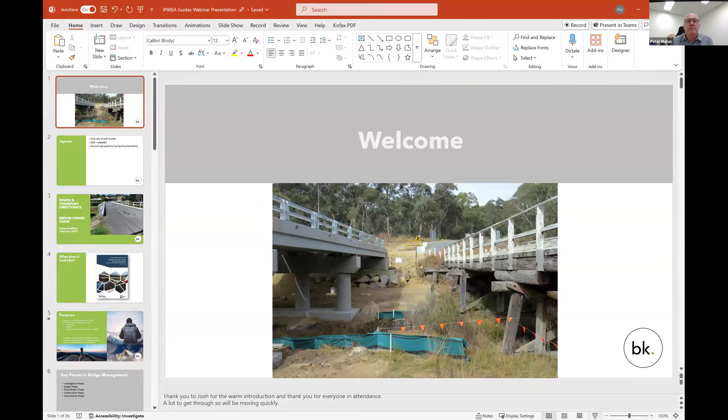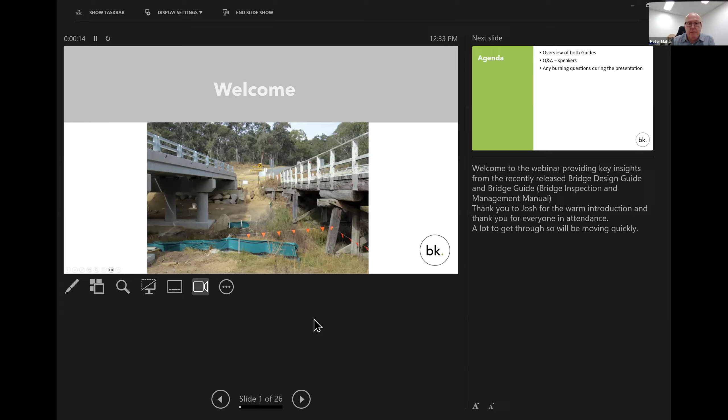I'll just share my screen and we'll get into the presentation. All right, I assume everyone can see that. Yeah, it's just on the presenter view, Pete. Oh, okay. We'll just stop sharing and swap things around a bit. Apologies for that. What about now? Yeah, all good. All right. Apologies for that.

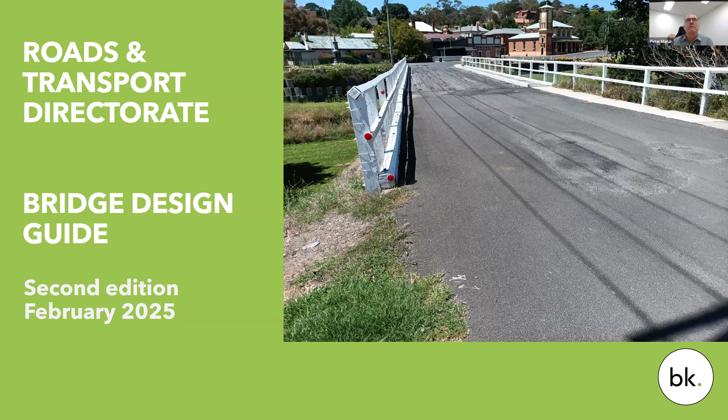So in terms of the guides, firstly, I'll look at the Bridge Design Guide. It's the second edition, so thank you for those that have been involved in the first edition. What's it look like? For those that haven't seen it, this is the front cover. I think Josh will talk about it towards the end, but it's available free for those members of the RTD. So just to give you an idea, that's what it looks like.

The purpose of the Bridge Design Guide was to look at investigation, design, construction and maintenance, primarily to assist local government team members involved in the management of bridge renewal projects in New South Wales. So it's really a heavy focus to assist local government, and particularly looks at guidance around what we call smaller bridge projects rather than the big Transport for New South Wales projects.

It's important to note that the guide is not intended to replace the wealth of existing information and publications available in this day and age. There's a lot of Austroads publications and other publications that are available, and it doesn't aim to comprehensively cover all the information necessary for bridge management. It's really a guide to point you in the right direction. So also, there's some really good Austroads presentations and documents, publications around. They're free.

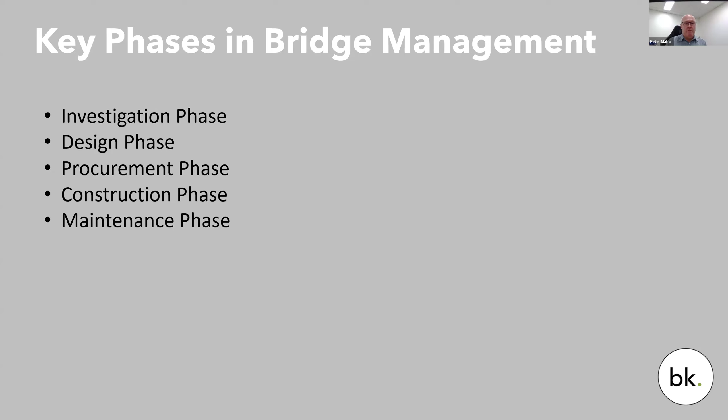So in terms of investigating a bridge when working out you're going to replace it, we've divided the guide into three critical areas. Prelim investigations are things you can usually do yourself, and are well worth doing before you get into detailed design required investigations. The detailed design required investigations are investigations you really should do prior to the bridge design. You can package them up to a consultant to do both, but generally a hydrology and hydraulics investigation and a geotechnical investigation should be done before the formal part of the design commences.

In terms of initial prelim investigations, have a look at council's records, and if you're lucky enough to have a bridge supervisor or a bridge team, get out and talk to them about what they know about the bridge. Even locals may know a little bit about flood levels, those sort of things. Do a site visit. We encourage everyone to get out and have a site visit, view the bridge, do your dial before you dig. I think it's called BYDA now. I don't know what that stands for, but it's the old dial before you dig.

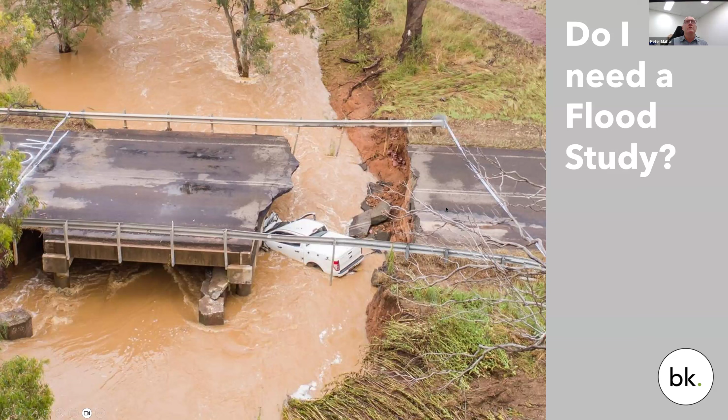One of them is that a bridge under AS 5100 should withstand the ultimate limit state load, which means structurally it should still be standing. It doesn't mean there won't be any damage, but structurally the bridge should still be available for use for a 1 in 2,000 year flood. That includes the effects of debris and scour. Debris loads can be quite large in a flood, particularly as the debris builds up against the bridge just before it overtops. That 1 in 2,000 year is usually extrapolated from the 1 in 100 year information, and that's allowable under the code. It looks at velocity of the water and the height that is going to be overtopped.

And then scour protection is also looked at to be 1 in 20 in AS 5100, so it survives a 1 in 20 year flood. In this case, although it's an older bridge, probably designed quite a while ago, it hasn't had the capacity to take the volume of the water during a flood event, and that would either be scour protection or the actual size of the bridge and its capacity to take a flow. So quite important. I just wanted to make that point around hydrology studies.

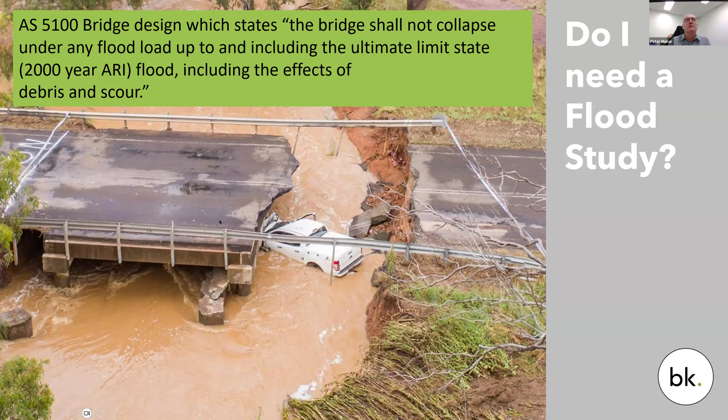A simple 1D HEC-RAS study to get velocities and heights shouldn't cost you a lot of money. Really should only cost $2,000 or $3,000. So people think flood studies cost hundreds of thousands of dollars. A simple catchment study for a bridge or a culvert shouldn't cost you a lot of money.

And then, yeah, I just wanted to labour on the hydrology and hydraulics. A lot of people get a little bit confused around that. Geotechnical investigation: at the end of the guide, we've actually got a sample document that you can use to go out and get your geotechnical investigations for bridge design. Key point there is you need to drill down to good strata. So you need at least 3 meters into a founding material, and that's usually intermediate to high strength rock.

So no point going out and dropping a drill rig down to 10 meters, not finding any rock, pulling up stumps and then giving that to a designer. The designer is going to tell you, I can't design the bridge foundation based on that information. So at the end of the document, we have got a standard brief there that you can use with some ideas around how you handle additional drilling depths and varying those in a brief that doesn't cost you a fortune when the driller's out there.

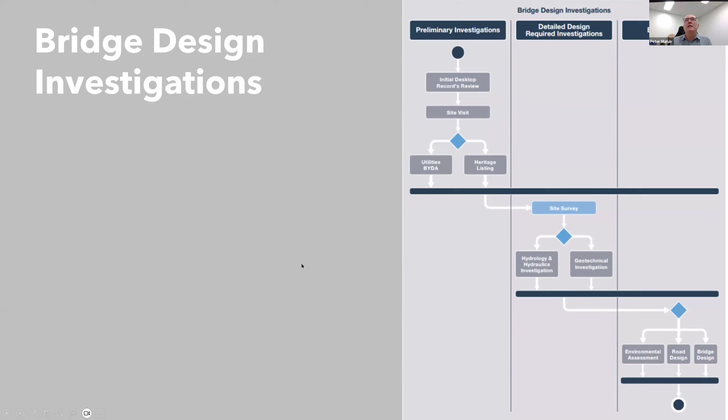And then in terms of during the bridge design, you'll have a road design component and you'll have environmental assessment. Some environmental assessment consultants or internal, you might be able to do that back in the phase before the design. Some require some prelim design information to go back into the environmental assessment. So just be aware that all those things can relate to each other. The road design and bridge design can impact on each other. So you need to be aware of all those things during a bridge design and manage them accordingly.

Again, just reiterating that the Australian Standard for Bridge Design, AS 5100 from 2017, is the required document. And then you've got the design phases. So typically, you can vary these. You do a 20% concept, which would only be a couple of pages, a plan view and a side view, but it just locks in the position of your bridge and gets everyone on the same page. You can jump straight to 50% design. There wouldn't be a lot of detail, but it allows you to lock down the key details before you move too far ahead. You don't want to be moving the location of the bridge at 80 or 100% design.

80% design is typical. We generally recommend 50, 80, 100, IFC. At 80 typically you've got quite a bit of detail, but there might be a few sections and some minor detail missing. Gives everyone an opportunity to review things like bearings and traffic barriers, and the design alignment for the road in a bit more detail. Then you'd move to 100%, which would be providing more detail and taking action on the 80% comments, and then really 100% to IFC should be just picking up any minor errors before you issue the IFC, issued for construction, documents.

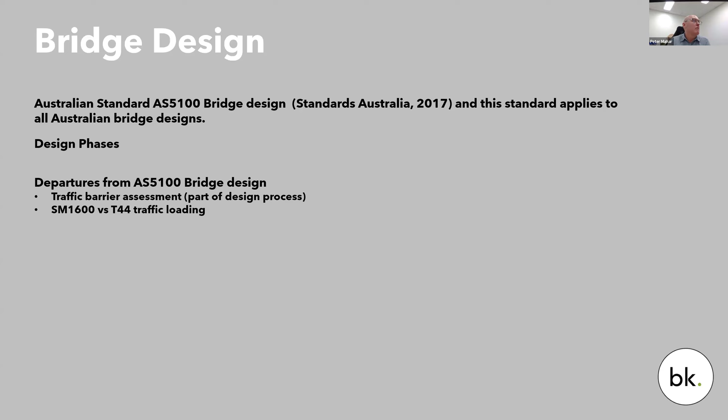But the important part in there that you need to recognise is that it is only the T44 loading and the loadings around that that change. And you need to be clear about that. Nothing else in the code should change. You're not going back to the old code when you go to T44. You're just using the T44, which is a 44-ton semi-trailer for your design vehicle rather than the SM1600. And that can cause a little bit of confusion. So hopefully that's clarified that a bit. If you still don't understand, happy to take a phone call or discuss at the end around the different bridge loadings.

Other things you should consider when you're doing a bridge design: safety in design. It is a legal requirement under the WHS Act in New South Wales to do a safety in design report. Now, again, it doesn't have to be a Bible. It's typically 1 or 2 pages, but your designer should provide it, and that's documented. And we go through that in the guide, where it comes from and where you can find more information around safety in design.

Road safety audits. Many of you would know what a road safety audit is. Just something that we've noticed with Transport for New South Wales more recent funding is they are calling for road safety audits to be tied to the funding so that you have to do it. So just be aware what your council policy is and what the funding requirements are around road safety audits and whether you have to do one or not.

The other area I wanted to talk about was just proof checking and verification. So often people think that proof checking and verification needs to be by an independent consultant. It doesn't necessarily have to be. I know some councils that we deal with just ask for a separate person within the organisation who's not been involved in the design. That's the only thing. They shouldn't be involved in the design process. Proof checking and verifying that it is per the code. Again, that shouldn't cost a lot. It's probably a day for a good bridge designer to independently check. If you go to proof checking and verification by an independent consultant, then that could cost you 7 or 10 grand, which you probably haven't got.

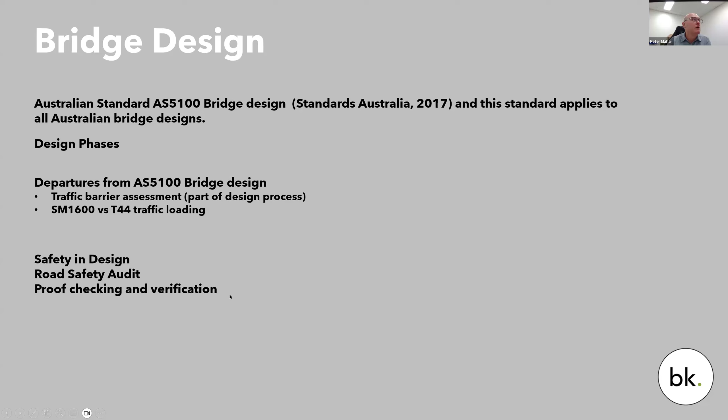So just letting people know that there are other ways that you can do proof checking and verification of designs, and it's always a good idea. Quality requirements in the design company probably should be doing it anyway, but it's not always the case, and it's something that you can ask for.

The other areas covered by the guide are procurement, construction and maintenance. So just around procurement, we provide a bit of information around the 2 typical procurement models that we see in councils, and that's usually construct only, so the design and all the design documentation and the specifications are done independent to the construction, and then the contract's let for the construction only, or design and construct. I know a lot of councils also these days are going to design and construct, where you let the design and the construction as one contract, and the contractor manages the designer. When you do construct only, you're managing the designer.

Now, there's advantages and disadvantages of both, and I won't go into a lot of detail about those, but you should be thinking through that. And if you're new to a council, maybe ask what council typically does and why, to understand that process before you get too deep into it. It does take a little bit more work from yourself if you're managing the designer separately from the construction, but you're more likely to get what you want than when you hand it over to the construction to do the design.

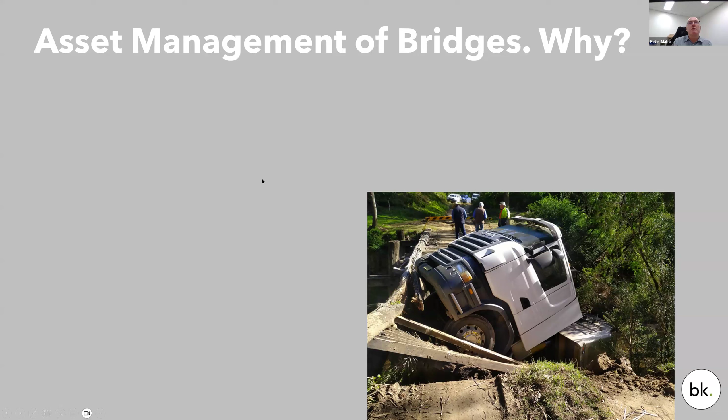So asset management of bridges, why do we do it? It's really about risk management. I found this was after a large bridge collapse in Italy. The media got onto it, but there was a professor in one of the unis called Dr. Caprani, and he estimated that 70% of Australia's bridges are more than 50 years old and are beyond their design life, and warning of the risk of a bridge failure in Australia, whether it be a total collapse or something

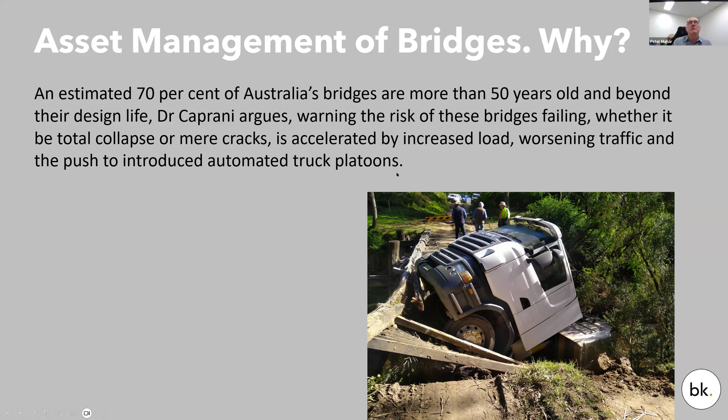minor, with worsening traffic and the push to introduce what he calls automated truck platoons, but be larger legal loads. And I think there's talk about B-triples running on part of the network, not that far west. So it's really about managing the risk. And I guess anyone from council with a reasonable number of bridges in their inventory would understand that a lot of them would be more than 50 years old. And certainly in our experience, we find that the average age of bridges is increasing each year. We're not replacing them as quickly as we built them many years ago.

And then just the different risks between road and bridge. I'm a bridge engineer at heart, got bridges running through my blood, so I'll always say that bridges are more risky than roads. Clearly you could hit a pothole and have a nasty accident, but the picture on the right, which is in Australia, from 3 or 4 years ago, overloaded truck, or I presume he's overloaded, or the timber bridge was in poor condition, and that's where he ended up, very lucky. So managing the risk of your bridge inventory from an asset management viewpoint is very important, and that's the reason for this document, to assist with that.

So, excuse me while I just bring up that guide. There's a comment from Tony Likas, Pete, that the bridge in the photo had a level 2 done about 3 months before that incident, and the truck was legal. So okay, well, I was speaking out of turn there. I didn't know the circumstances. I was just lucky enough to get the photo. Tony was aware of the bridge. So Kyogle Bridge. Yep. Thanks, Tony.

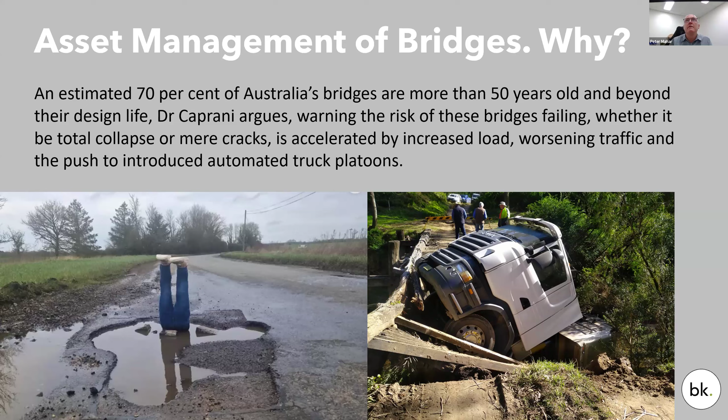So this guide heavily follows the Austroads engineering guideline to bridge asset management from 2021. So that's a key document that should be read hand in hand. It's quite an extensive document. It's potentially more aligned to larger bridges, but it's still got some really good information for those managing a local government inventory, and we just tried in the guide to provide a bit more context for local government.

One of the key things when we look at bridges is what is a road bridge. So we've used the Transport guide there, and that says that whether it's a box culvert or a bridge, any structure that goes for more than 6 meters along the road is a bridge. So Transport actually define your larger box culverts as a bridge. They exclude pipes and anything that's a fauna or cattle underpass, generally an underpass.

I have seen some overpasses. They also classify as a road bridge, even though it's only for stock or fauna. Now, you generally see those on the Pacific Highway. I'm not aware of many council ones. There used to be one up the Tweed that carried a dairy herd, an old timber one. I don't know if it's still there or not.

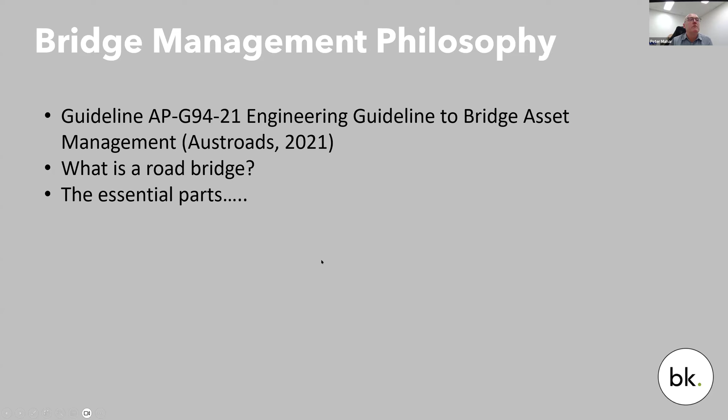Most people these days, most councils have got their inventory. And then, as Tony was talking about, you need to be inspecting your bridges on a regular basis. So we'll get into a bit more detail later on for timber bridges, what the transport recommendations are. You don't have to exactly follow transport, but I'd say you definitely should have something documented. If you're going outside of what transport is saying, that's fine, but just have it documented. And then just developing some costings around how you're going to improve your inventory, and we'll get into that in a bit more detail.

So I just wanted to talk about bridge inspections in terms of the Transport for New South Wales documents. There are 2 Transport for New South Wales documents. They're the only agency that uses 2 documents to explain their bridge inspections, which can be quite confusing. If you download their manual, all you're getting is a manual that tells you how to do a bridge inspection. Now, it's quite a good manual. It's pretty old, so it's a little bit out of date compared to some of the other agencies around Australia, although it's got some great photos for condition assessment in that document.

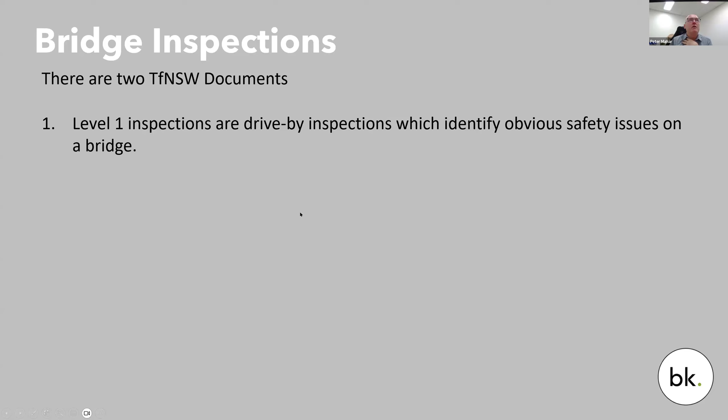But then they've also got a policy, and we reference that policy in this guide. That outlines what the different inspections are and how often you should do them. We often get phone calls from people saying, we've downloaded the transport manual, we can't see anywhere in it that it tells you when and how to do your inspections. So that's in a different policy document. You need to have both.

So level 1 inspections are generally just a drive-by. Typically, you wouldn't be getting out of the vehicle. It could be done by your road inspector, just trying to pick up any obvious safety issues on a bridge. It could be that someone's hit the guardrail, there's a bridge joint loose, or in a timber bridge, it's rattling like hell. Just picking up those sort of things.

The level 2 is the condition rating, which should be conducted in accordance with the bridge inspection procedure and by certified bridge inspectors. I'll talk about certified bridge inspections a bit later on in the presentation, on this particular slide. But you condition rate every element in the bridge in a level 2 and document it. And usually, the required maintenance actions will come out of that level 2.

In New South Wales, a level 3 inspection is usually after a level 2, or could actually be combined with a level 2, but it involves a bridge inspector and an experienced structural engineer, and you're doing an inspection of the bridge with those 2 people picking up more critical items. And you would use something like an under-bridge inspection unit. The general rule of thumb is you should be able to touch the element that you're looking at, whereas a level 2 you can do with binoculars. You can do it in different manners. You don't have to get up close and personal to things like bearings.

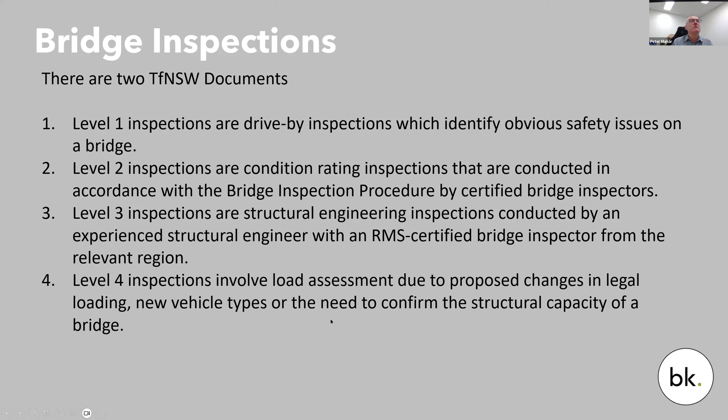Now, the transport document talks about RMS certified. It's an old document from when transport was Roads and Maritime Services, an RMS certified bridge inspector. There's not many of them around, and it's almost impossible to get into the RMS course unless you're in RMS. So, in our opinion, councils should just be documenting that it's replaced by an appropriately trained and experienced bridge inspector. And it's as easy as that.

In our mind, there's an IPWEA level 2 course. I think there's a Roads course. There's other courses around, or there may be just a supervisor who's been around for a long time and knows a lot. So, appropriately trained and experienced. I wouldn't get into certification too much unless they're young and green around the ears.

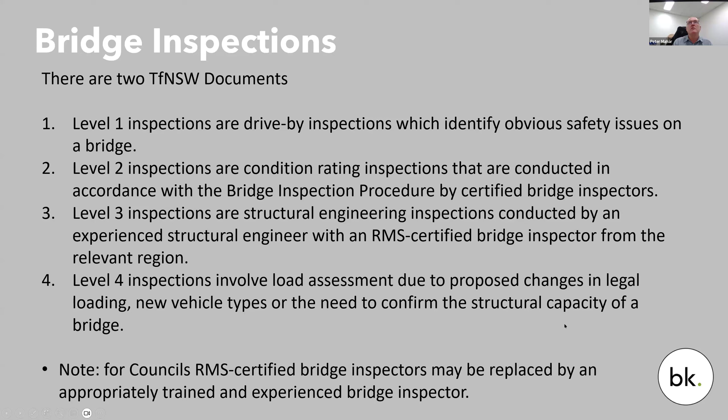Again, this is just a guide. It's a quick reference guide. You should be going to the actual procedures or manuals in the relevant jurisdictions if you want to really know the detail.

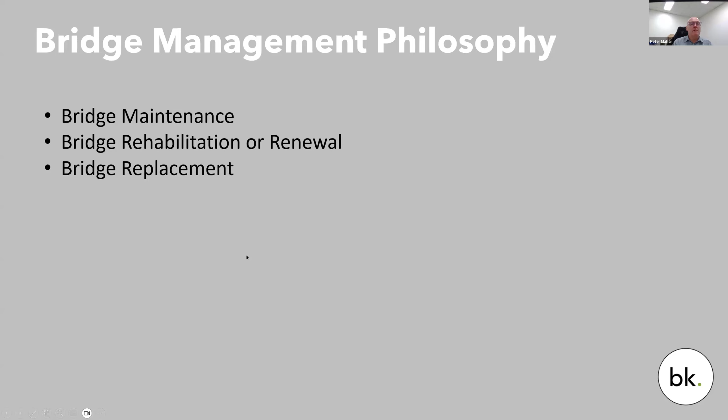Bridge inspection and financial management. So we're going to get into a bit more detail here around bridge information and data collection, your bridge inventory, and particularly timber bridge inspections and testing methods. Sorry, I've just jumped ahead one there. So in the guide, we get into a fair bit of detail around timber bridge inspections.

Why we've done that is timber bridges are vastly different from an inspection regime than a concrete or steel bridge. And typically, if you want to do a level 2, Transport for New South Wales recommend in their methodology a test bore every 4 years. A test bore would allow you to check the actual internal rate of decay of timber. Timber often looks great on the outside, but may have significant deterioration internally.

The guide leads you through quite a bit of detail in terms of a level 2 inspection, how to do it for a timber bridge, what it involves. In particular, in terms of a level 3 and a level 4 for timber bridges, we outline the details in AS 5100 of the different ways you can inspect and do a level 3, level 4 load assessment of a timber bridge. So there's various technologies that people are out there selling.

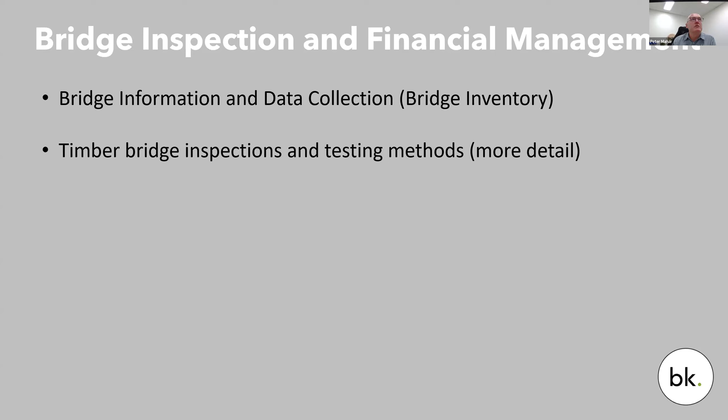So quite a bit of information on the guide there, because we just felt there was a bit of confusion in industry around that. Putting together a 10-year bridge management plan.

So you'll have a difference between OPEX and CAPEX budgets. So most councils are running a year-to-year operational budget for your maintenance, that's OPEX. So when you get into the major rehabs and what we call renewal, and the reason we use renewal is that aligns with Austroads documents, would be under CAPEX, and a replacement would be under CAPEX. So you'd need a specific budget to do those works.

So when you're planning out a 10-year plan, you need to be differentiating between your yearly maintenance cycles, where you've got a pretty consistent budget, hopefully, to do your bridge inspections and maintenance across any given year, and then what CAPEX you then require to do your renewals and your replacements.

Estimating, you'll have to do some sort of estimate around your renewals and your replacements. I always say estimating is part art, part science. It's not all science. So in terms of art, ask those in your council, particularly those that have been around for a while, what are the typical square metre rates for a bridge replacement? What are the typical rates for replacing a girder on a timber bridge, redoing a deck? Your council should have a lot of that information.

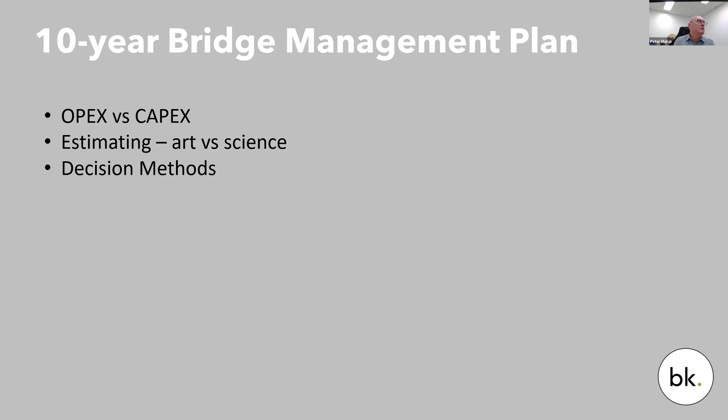Your bridge asset management plan, where does it fit? Our understanding is that under the new government requirements, a bridge asset management plan would sit within council's transport asset management plan. Generally, from our understanding, the road plan will include a bridge component. So that's where it sort of fits in the overall framework.

What are the key components? We've just gone through how to get there, and then you'll have a 10-year plan that would outline what dollars you need at what stage. Generally, you'd have all the bridges listed on the left-hand side, and then year 1 to 10 across the top, and then whether they're renewal, rehab, and what dollars you need, and then your bridge inspections and typical maintenance would run across the top.

But we don't go into much detail in the guide around that, because the Austroads guide actually goes into quite a bit of detail and has got an example. So they're good places to go.

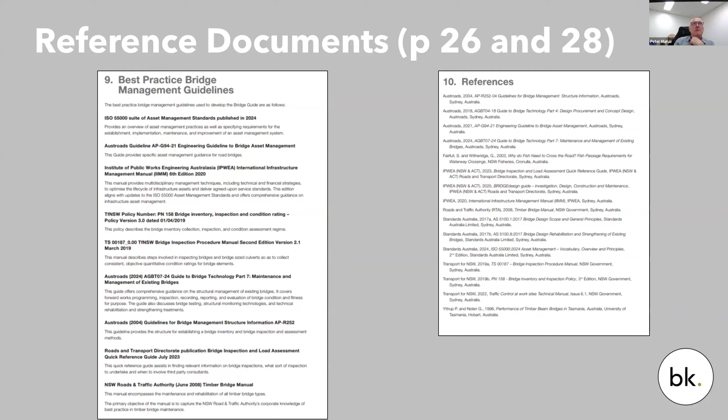And then the New South Wales Roads and Traffic Authority Timber Bridge Manual. I believe it's still online. It was never actually officially published, but it can be found online. It's a good guide around timber bridges. And then just the reference documents that we've used to bring the guide together. So that's on page 26 and page 28 of the guide. So that's a very quick run through, a lot to chew through in an hour. So apologies if I've run through that very quickly, and happy to take any questions.